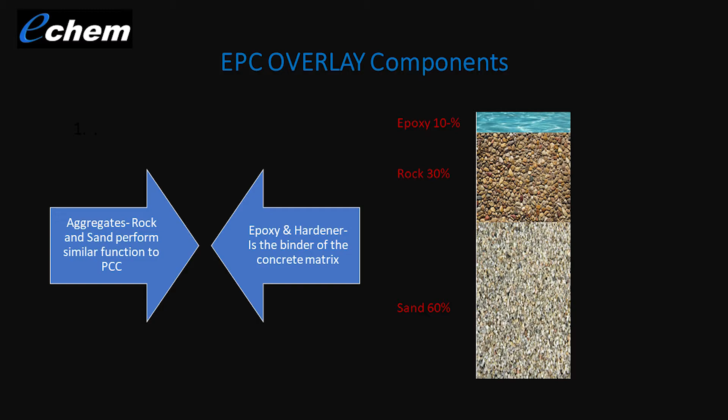Kind of the secret to the sauce here, we need to keep the resin loading very low for our EPC concrete. We target 10.5% to 12% by weight. So it works out in this matrix: 10% epoxy, 30% coarse aggregates, and 60% sand. Very similar to a Portland cement mixture.

So why EPC overlay? We developed EPC with a very specific target. We wanted to make sure it's going to meet future environmental concerns. We have zero VOCs, no HAPs, very low odor, rapid curing, and we're moisture insensitive. It's a rapid return to traffic.

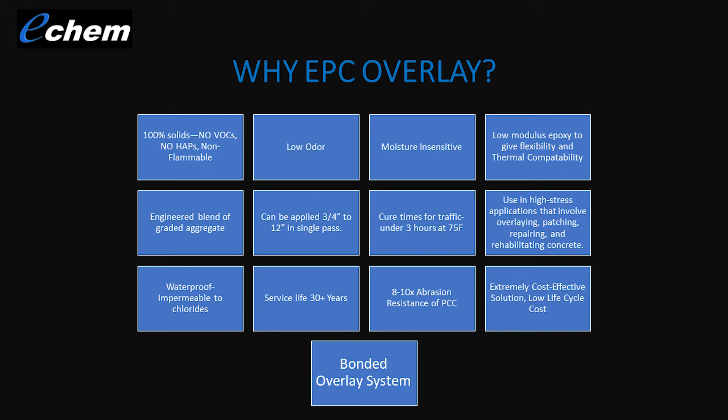So in 3 hours at 75 degrees, we're traffic ready. So if there are time constraints and concerns for short traffic closures, this is a very well-suited product.

Different applications: obviously the wholescale bridge deck overlay application that we're going to discuss, bridge joint nosings, replacements, abutment repairs, pothole and deck repairs, grade correction, rut infilling. It's really a multiple use product.

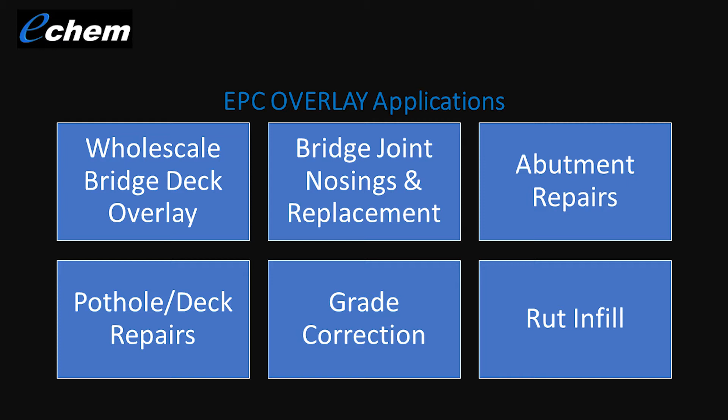So during the installation process, we're going to quantify the material needs like we discussed, evaluate the environmental conditions, deck preparation, forming, primer or pre-treatment, mixing, placing, finishing, cleanup, and then making sure we have the proper cure time.

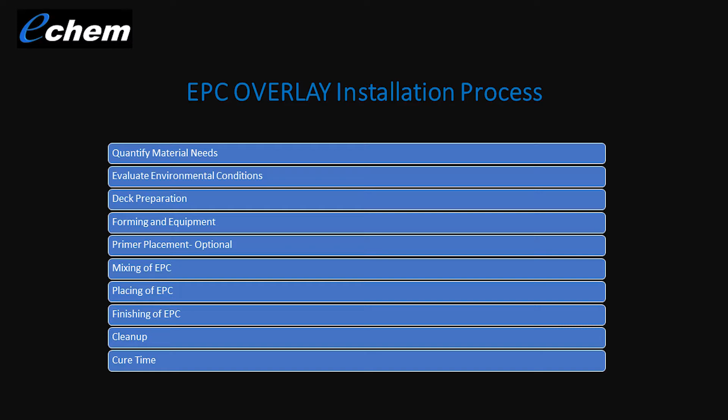There were multiple concerns about this project and the viability of rescuing this deck. So we were able to come in, help the DOT come up with a process, and came together with a contractor to get this done. It was about a 60-day delay by the time we started, evaluated it, and got it to the point where we were able to correct it.

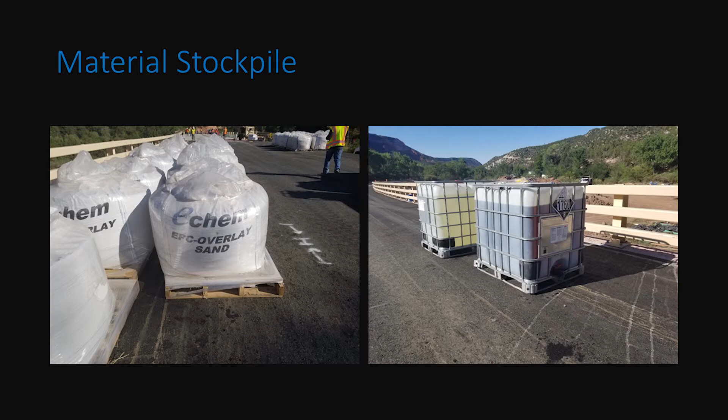So we figured out how much material we needed, got all the material on site. Surface preparation: after we milled the high spots down, we came in and shot blasted. Shot blasting is a process where we're abrading the surface, creating a surface profile that makes it a suitable bonding surface for the EPC overlay.

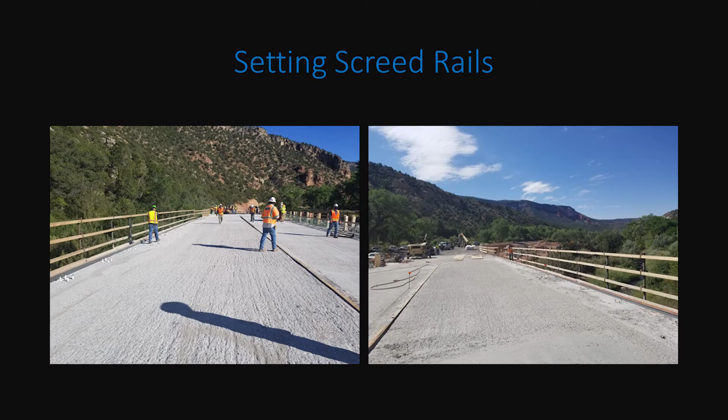Getting the deck ready to place for forms, we need to figure out how we're going to screed and place this material. There are multiple ways and processes to do this. On this project, the contractor chose to use a vibrating pan screed with screed rails. In this process, they'll place a screed rail for their paver.

They'll set the elevation, make sure it's anchored. We'll do a dry run and check elevation throughout before we even place the material. We want to make sure it's going to be a one and done installation here. If it's a bridge deck paver like a Bidwell, same process.

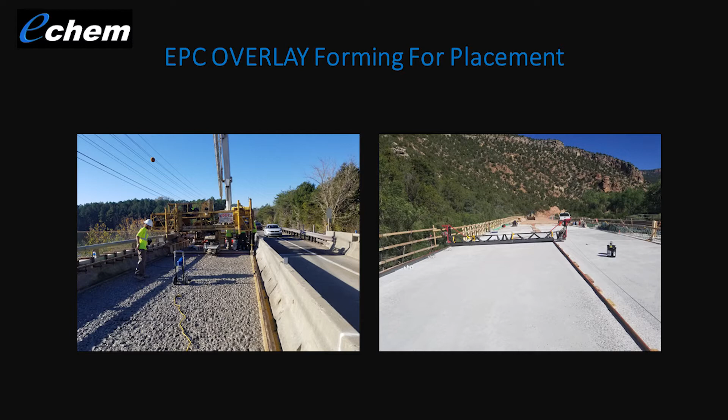We'll set screed rails, get the elevation correct, do a dry run, and proceed with that. Self-propelled pavers out there are kind of the newest technology. They'll set a guide wire on both sides, and that's the elevation control for the paving equipment. It's critical that whatever process is used, we're confident in that elevation.

This is the project we were looking at earlier. This is the first pour on it, would be the south side of the bridge. They actually use the edge forming from the original pour for their screed on the south side, and then they set their elevation on the north side. Here's a representation of a Bidwell paver where they set the screed rails, hung them off the bridge rail on one side, and then set a pipe on the other. And then the right picture is the Jemez project where they were doing the dry run with their screed paver.

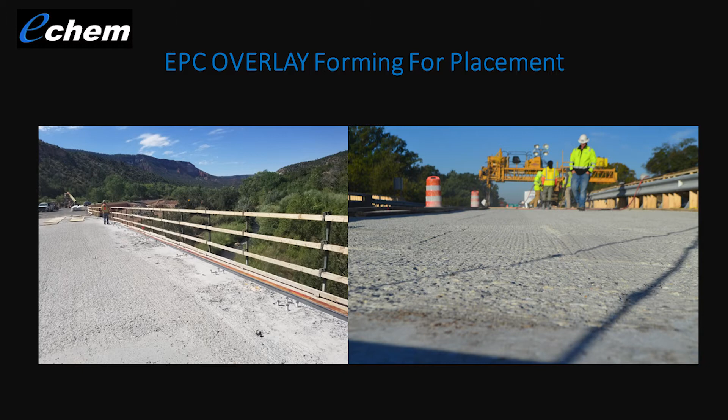A couple more pictures. The Jemez was actually a really nice location, but it was cold in the mornings because we had that river high elevation, about 8,500 feet at this point in the valley. This picture was a project we did in Oregon.

It was a fire service bridge that they tried to put a couple of different overlay systems on. They weren't able to complete it just because of the location. It was a very remote location, and we were able to get the EPC in there and get that project done. We got the truss screed set on the deck.

We're talking about doing the dry run to make sure that we have good clearances. We don't want to get too tight. We need a minimum of 3/4 inch clearance. That's the reason we do that dry run.

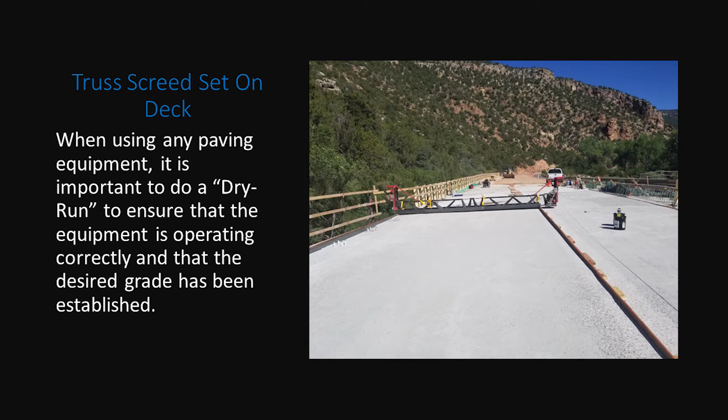Primer installation, the reason we use a primer or pre-treatment is to address any surface cracking. We want to make sure we address surface cracks, we fill them. That way it's kind of a belt and suspenders application, so we can fill and seal off any subsurface cracks there.

The primer goes on in a very thin application, anywhere from 70 to 120 square feet a gallon, depending on the surface texture and porosity of the deck. It's a flood coat, and then they'll come back and push the excess forward with brooms, squeegees, rollers. We want it really as thin as possible. We don't want to have an excess of material in that bond area.

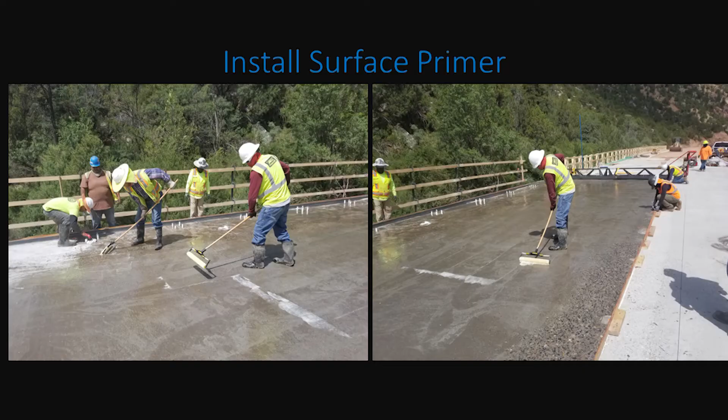A couple more pictures of putting down the primer. Some contractors choose to spray it. The EPC comes in a couple different packaging options. We have small bag kits all the way up to bulk packaging like we did up here in Jemez.

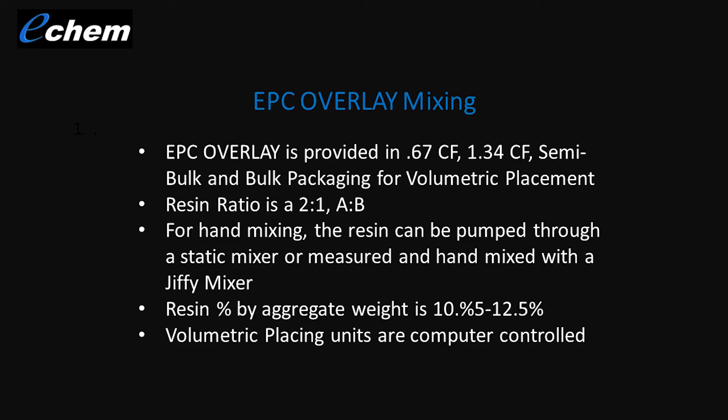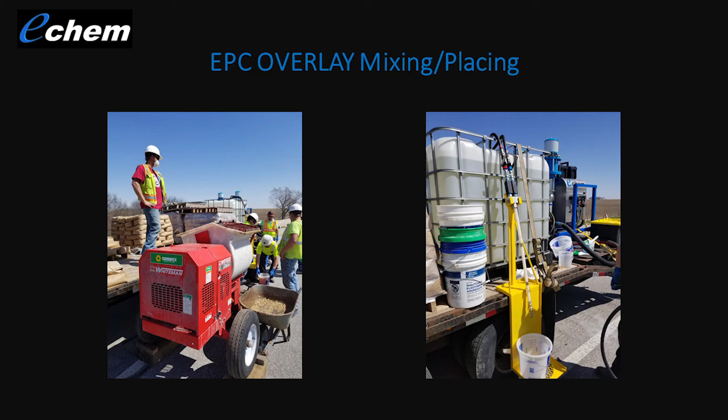The bulk packaging is going to be more for the volumetric equipment, automated batching equipment. This is a semi-bulk where we're actually pumping the resin through continuous pumping systems, and then we just break bags into mixers. This is the volumetric truck that we used up in Jemez. It's a smaller truck, about 6.5 yards.

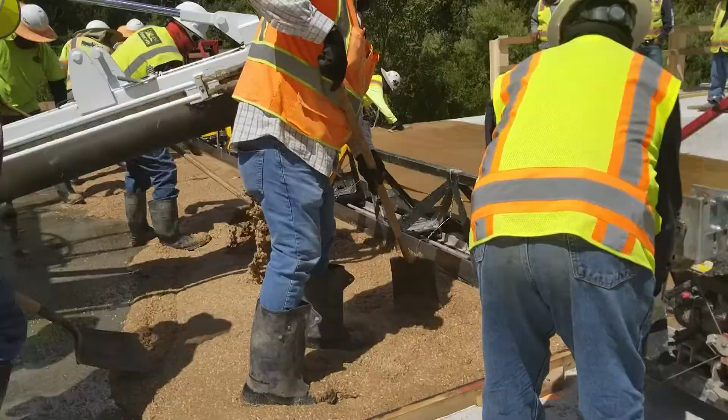A few pictures of the placing. The placement's very similar to Portland concrete placement. It's a higher slump product. It actually places and smooths very well. We use a vibrating truss screed. We want to make sure we get any of the air out of the material, and there's a resin that will float up to the surface, and we'll put a traction aggregate into that surface.

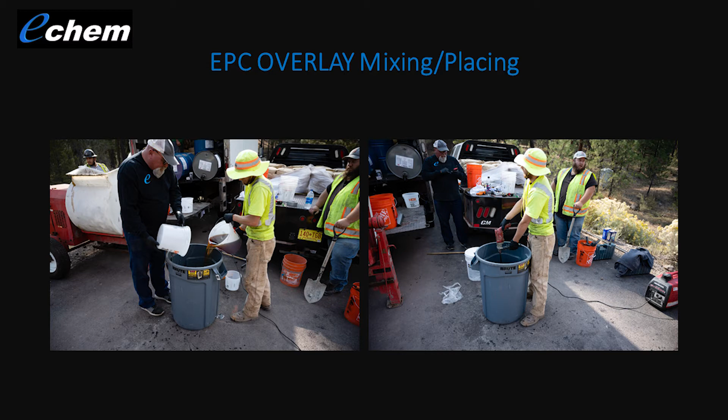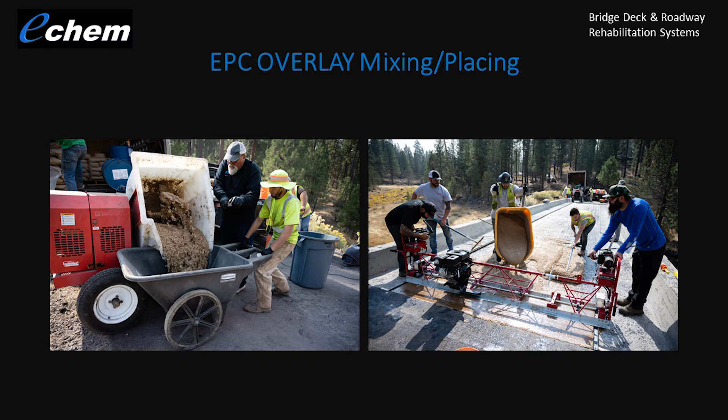This is a hand mix application where all the liquids come pre-measured, pre-packaged, and then we bust bags of aggregate into a mixer. This was that project up in Oregon. We're doing 1.34 cubic foot batches. They just use wheelbarrows or muck carts to take it down the bridge. This is a volumetric installation.

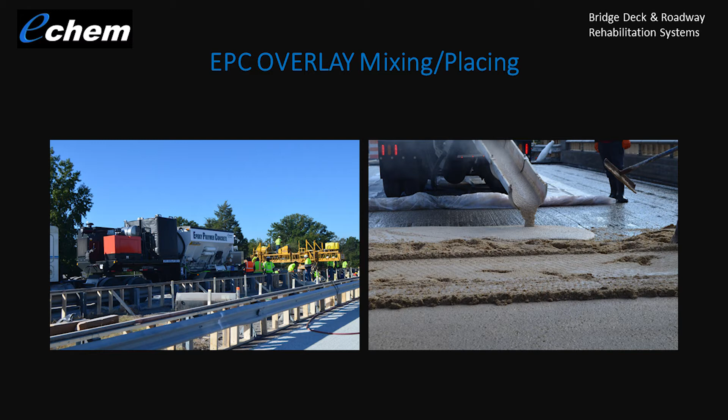This is in North Carolina. This provider actually has an office and facilities here in Pennsylvania, so this equipment is available up in the Northeast.

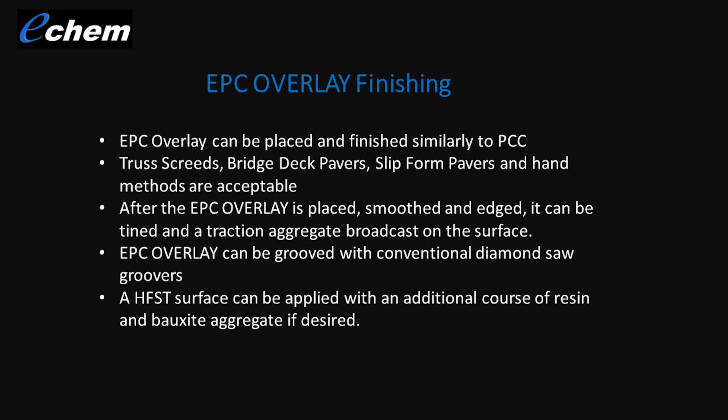Finishing, so when we finish the EPC overlay, it's going to be very similar to any Portland concrete finishing process on a bridge deck. We can use truss screeds, we can use bidwell pavers, slip form pavers, so there's a lot of different equipment options for contractors, so we're not limiting the construction process to one group of professionals.

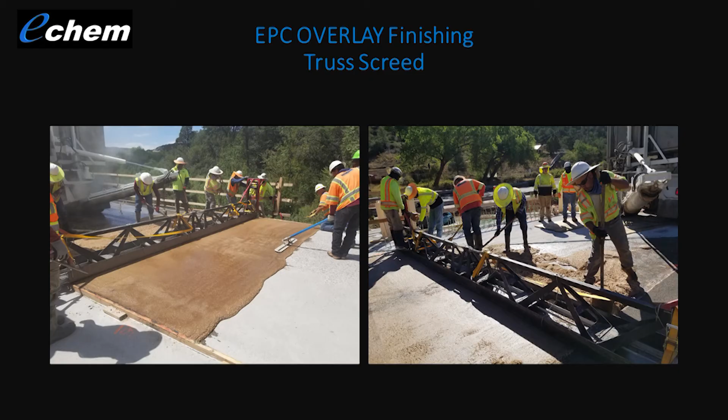This is the finishing with the truss screed. We just finished a project in Idaho as an FHWA STIC grant, used the same process up there. It was a demonstration project to show that even city and county crews can do smaller installations with crews and equipment they have on hand.

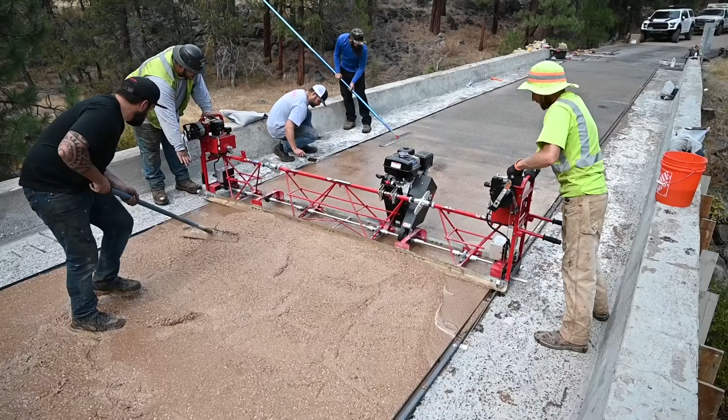This is finishing it using a bridge deck paver, the Bidwell. This was North Carolina, 4 bridges we completed in one weekend. You see with the Bidwell, it's very similar to any other bridge topping process with this system.

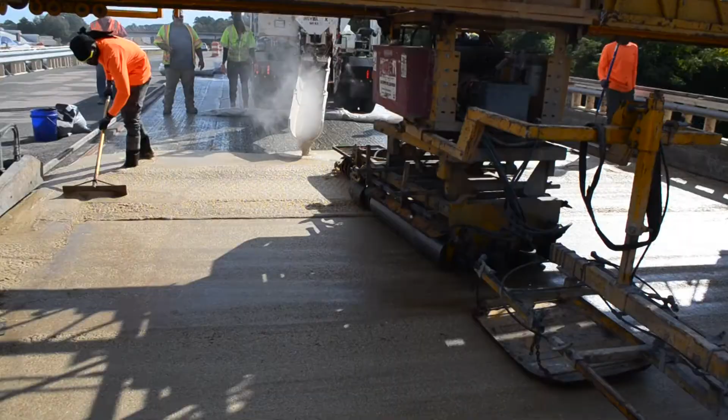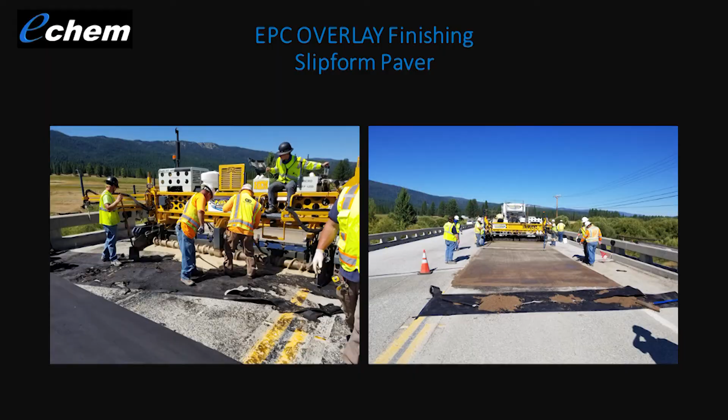This is the automated paver where they set the string line for their elevation. You dump the material in front of it, it places, finishes, and gives you correct grade as it proceeds down the deck. And then for the edges, those are completed by handwork, just smaller batching, coming in to tie in the areas that the pavers miss.

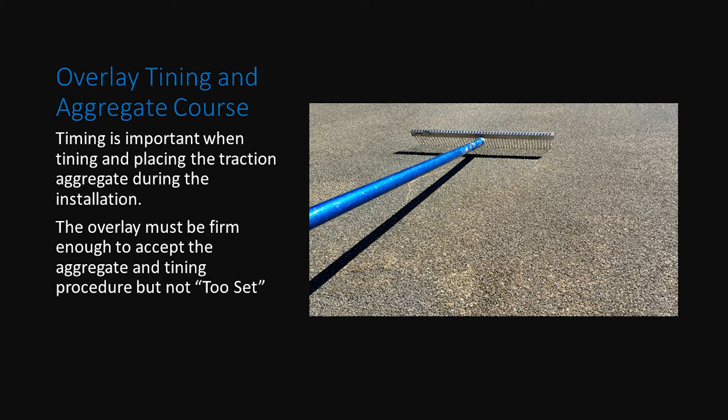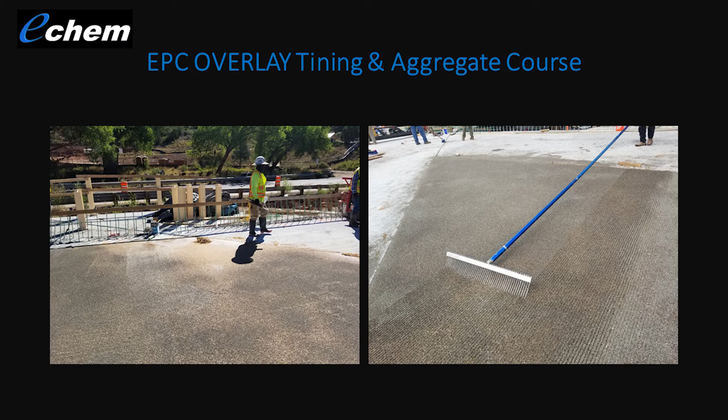And then for your finish course, we can do tining, saw cutting, grooving, or just leave a high friction surface course or aggregate wearing surface for your final placement. The aggregate course is just a hand broadcast to address any loose resin that might be there. We don't want to provide a dangerous driving surface, since resins can be very slippery when they get wet.

So anyways, any questions? Yes, sir.

With the truss screed, it's kind of a timing thing. It's usually within 5 to 10 minutes, you're back there dusting, and yes, we want to get a little bit of that resin to float, and then we'll just tie in the edges. As soon as that's done, we're ready to put the aggregate on there, so it's just a few minutes later we're putting the aggregate on.